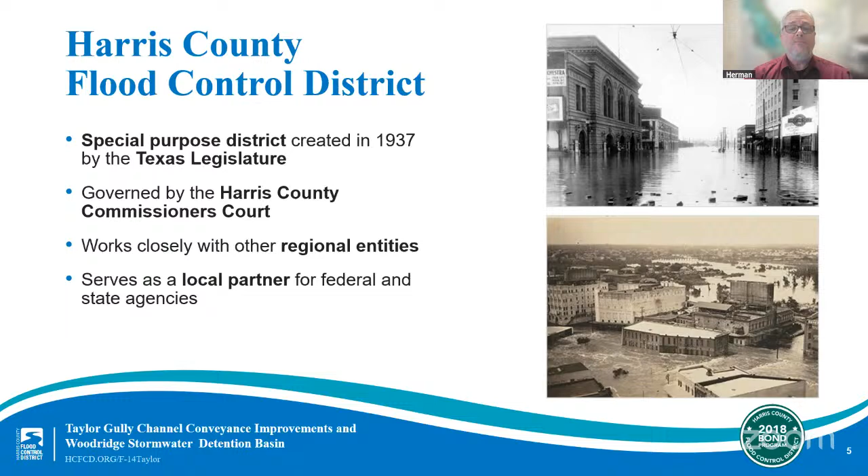The Flood Control District is incredibly unique in its mission. In addition to the unincorporated areas of Harris County, we also have 32 municipalities within our boundaries. Our agency can partner with these other cities, precincts, and local agencies to work together on flood risk reduction projects at both the local and regional level.

So not only do we plan and implement new projects that expand and improve our drainage network, but we also have maintenance teams working day in and day out to help keep our bayous and channels ready when the next storm hits. In fact, it's built into our mission to plan, implement, and maintain flood risk reduction projects guided by community and natural values. That last part, guided by community and natural values, is so central to who we are.

And it's also one of the most difficult challenges we face, building projects that not only reduce the risk of flooding, but also respect the needs of the community and the environment, especially in a highly urbanized area such as Harris County. That's why your input at meetings like this matter so much.

I'm sure it's safe to say that everyone joining us tonight probably knows that Harris County is prone to flooding. But why? Not only do we have extreme rainfall events like tropical storms and hurricanes, but our land is flat, which means stormwater often moves slowly, making its way to bayous and channels.

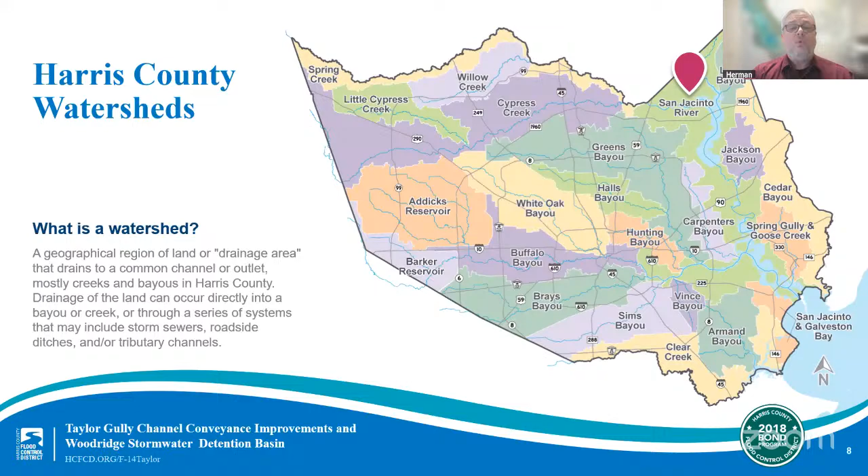Those drainage systems are typically managed by either the Harris County Engineering Department, a municipal utility district, or a city, like the city of Houston. The stormwater then makes its way to the larger bayous and channels before it finally heads out to Galveston Bay.

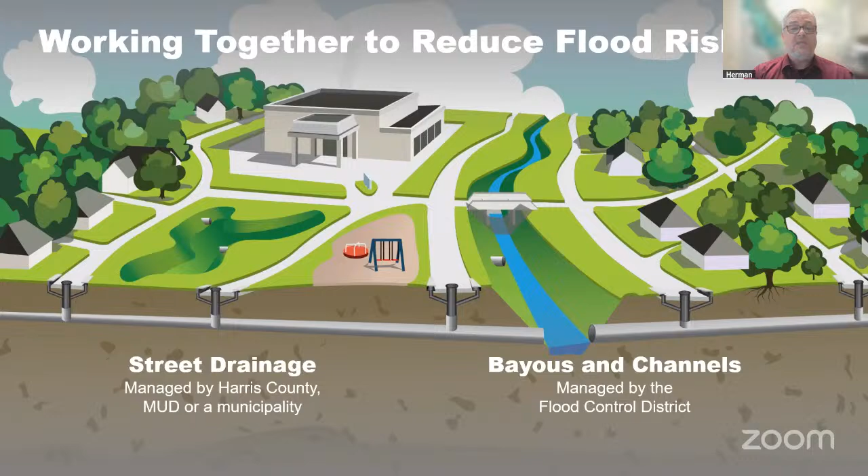We take our role in flood risk reduction for Harris County very seriously, and we leverage different types of funding opportunities for projects that can help reduce the risk of flooding in our region. One very important source of funding comes from the 2018 bond program.

Back in August 2018, Harris County voters approved $2.5 billion in bond funds for flood risk reduction projects across the county. This decision didn't happen overnight. Before the election, we held 23 community meetings, one in each watershed, because we wanted to hear directly from the residents about their priorities and concerns.

Those conversations helped shape what is now a list of 181 bond IDs, of which more than 20% were added directly from community input. Each bond ID can include multiple projects. The actual timing of each bond project depends on several things like funding, environmental permitting, right-of-way acquisition, utility relocation, and specific grant requirements.

It's important to note that even though voters approved $2.5 billion for the 2018 bond program, the estimated total cost of every project on our bond project list is actually much higher than that. From the very beginning, we've been clear: in order to see all bond projects through construction, we would need funding partners.

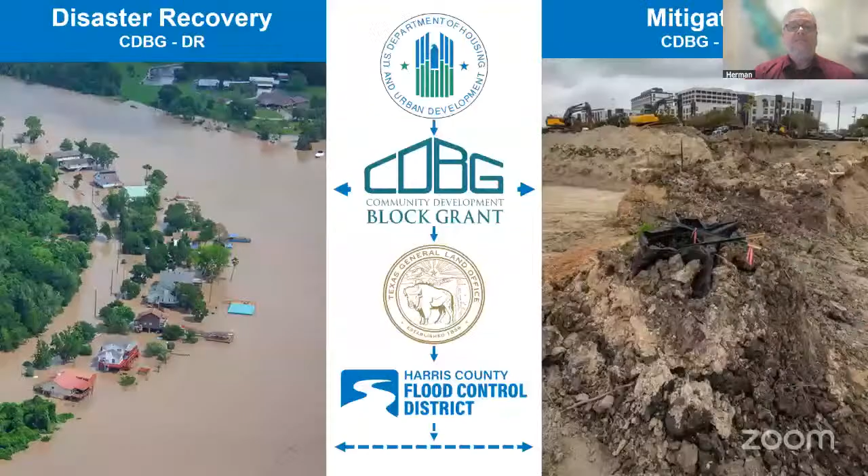Now I'll share a little more information on the funding partners and cost of this project. First, the estimated total project budget for the Taylor Gully Channel Conveyance Improvement in Compartment 1 of the Woodridge Stormwater Detention Basin project, under the project charter, is about $56.9 million.

I want to highlight one funding partner for this project, and it's the U.S. Department of Housing and Urban Development, also known as HUD. The Community Development Block Grant Mitigation Program is one of the funding programs under HUD. Mitigation funding focuses on mitigating the risk of future flooding in a community.

The Texas General Land Office, or GLO, administers the grant program at the state level for HUD. This means the GLO distributes funds to local, county, and state agencies that apply for and are approved to receive CDBG mitigation funding for projects designed to reduce the risk of flooding in the future.

The Flood Control District has been awarded approximately $541 million for projects meeting the requirements. The Taylor Gully Channel Conveyance Improvements and Woodridge Stormwater Detention Basin project is receiving $41.94 million in CDBG mitigation funding. All Flood Control District projects receiving CDBG mitigation funds must be completed by March 31st, 2028.

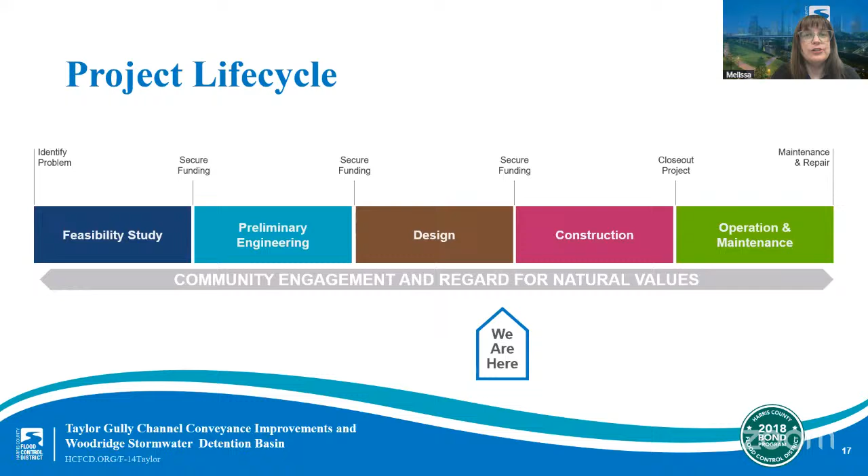We're aiming to have this life cycle stage completed by October of 2025. There are additional steps required prior to starting construction, but we anticipate breaking ground on this project by the second quarter of 2026. We'll talk more about the next steps in a few minutes. But first, let's take a closer look at the project area and the recommended design.

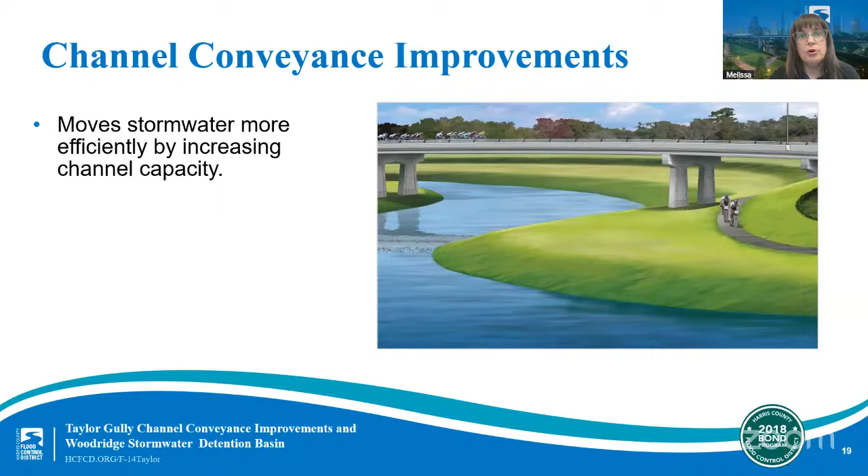So before we get into the specific details of this project, we want to define what we call channel conveyance improvements and explain how they help with flood protection. Simply put, channel conveyance improvements are man-made changes to a waterway that help it move more water, especially during heavy rains. These modifications help reduce flood damage by giving the channel more space to carry water through. This can be done in a couple of ways: by widening and/or deepening the channel, or by clearing out vegetation to reduce friction.

Now let's talk about stormwater detention basins and how they help with flood mitigation. While channel conveyance improvements help move stormwater more efficiently out of an area, stormwater detention basins hold the stormwater in one place, but only temporarily. We strategically place them in areas where they can catch extra stormwater and keep it from overwhelming channels and flooding downstream communities. Once water levels in the channel go down, the stormwater stored in the detention basins flows through pipes back into the channel and eventually out into Galveston Bay.

As mentioned before, the Flood Control District is a no adverse impact agency, meaning we do not allow our projects to reduce flooding risks for one area while increasing the risks somewhere else. That's why stormwater detention basins are often built before or at the same time as channel conveyance improvements, to prevent any unintended impacts downstream. So first we give an area the ability to store excess stormwater, and then we find ways to move it out of the area even faster.

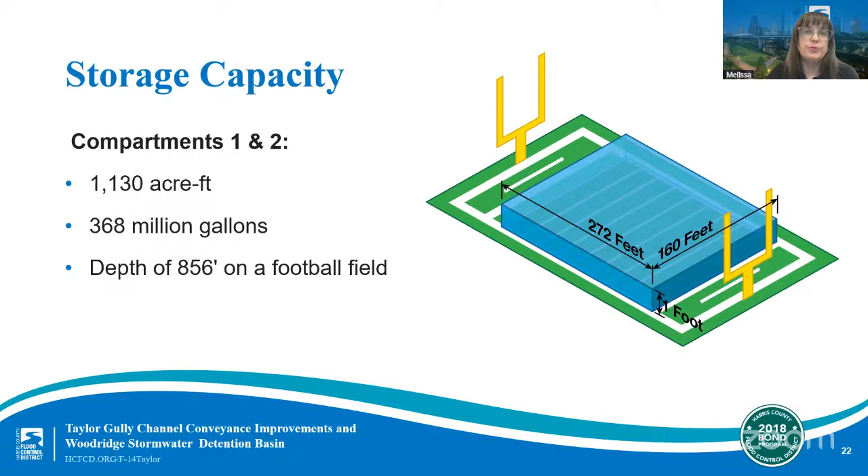So with this information in mind, let's dig deeper into the recommended project design.

This project includes approximately 2 miles of channel conveyance improvements along Taylor Gully. These improvements include installing a concrete low-flow rectangular channel in the center of Taylor Gully, approximately 350 feet downstream of Creek Manor Drive to the existing drop structure 1,500 feet downstream of Mills Branch Drive.

The existing grass-lined slopes will remain intact as much as possible. The flow line of the concrete low-flow channel section will require the existing culverts at Rustling Elms Drive to be lowered by approximately a few feet, and therefore the proposed design also recommends replacing these culverts with a 3-span bridge.

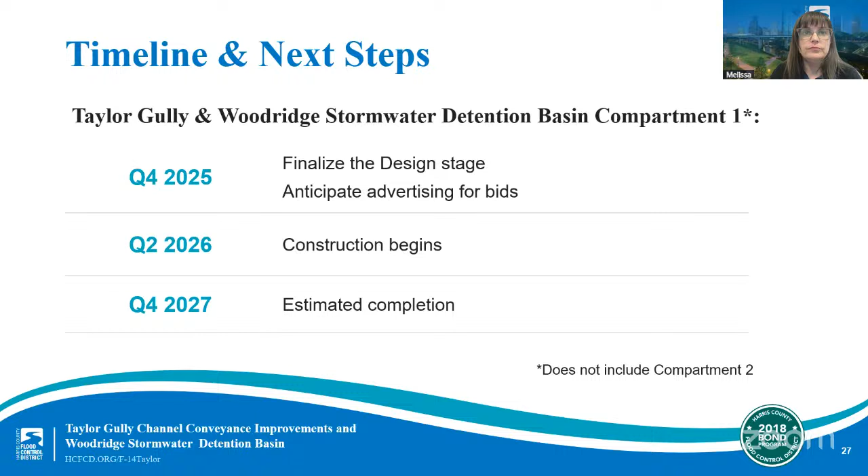Again, we appreciate you attending this meeting to listen and learn more about our work. And it's now time to hear any questions or comments that you'd like to ask or share. So I will hand it back over to Robert to kick off the Q&A portion of tonight.

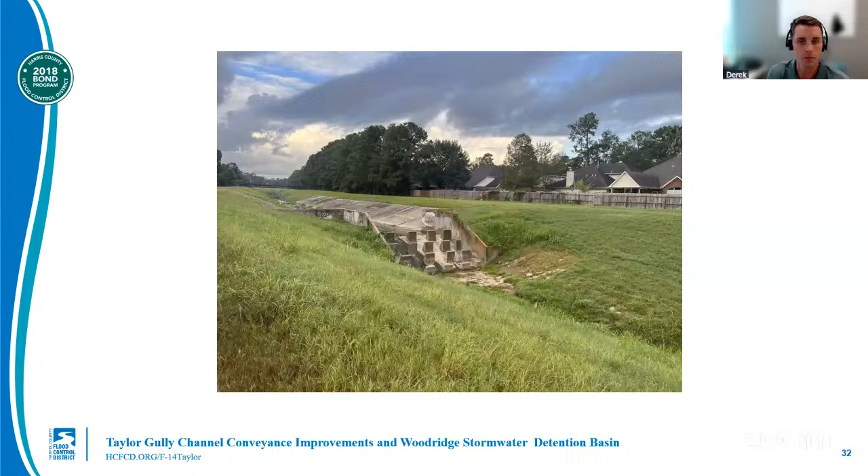Yeah, definitely, thanks Robert. So like Melissa mentioned in the presentation, the concrete-lined section with the low flow has vertical walls, so it is common throughout Harris County. The Taylor Gully channel has a certain amount of existing right-of-way available, and it goes through an established neighborhood, so there's not really any right-of-way that can be acquired through this area. So this is a perfect solution when we're trying to get channel improvements where you can't widen a channel because you have limited right-of-way.

All right, thank you, Derek. And we do have another question for you. Derek, we touched on this some in the presentation, but can you please explain why construction of compartment 1 will be occurring in coordination with the channel conveyance improvements?

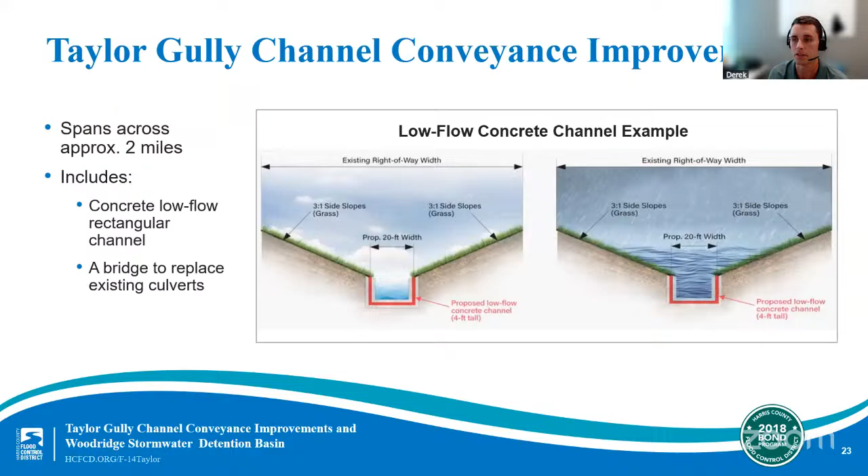Melissa had another slide on this about the stormwater detention basins and what those are mainly designed for. For this project, the storage volume is needed in order to mitigate the impacts from the channel improvements. This is why we're constructing compartment 1 — we want to make sure the project doesn't increase water flows or raise any surface elevations downstream of the project area. So stormwater detention basins are usually built before or at the same time as channel projects.

All right, thanks Derek. Emily, our next question is from Mr. Miniter, another HOA board president in the area. He mentioned that the flood control district recently desilted Taylor Gully from Mills Branch Drive to Mill Branch Way, and he is concerned about the section of Mill Branch Way and West Lake Houston in Mills Branch Village. He says that some of the corrugated metal storm drain outflow conduits have been damaged. Also, he mentions that some of the banks have collapsed into Taylor Gully. He's requesting maintenance on this. Emily, can you please talk about the best way to address this concern?

Sure, absolutely. Thanks Robert, and thanks David for flagging that for us. We don't have our maintenance team on tonight, but as soon as I saw you sent that in, I flagged it for our head of maintenance internally, and I'll follow up on that. In the meantime, I'll also drop you a note in the chat with our Citizen Service Center where you can share photos if you have them or any background that might be helpful. I'll make sure to work with our team and have some crews go out and take a look at that.

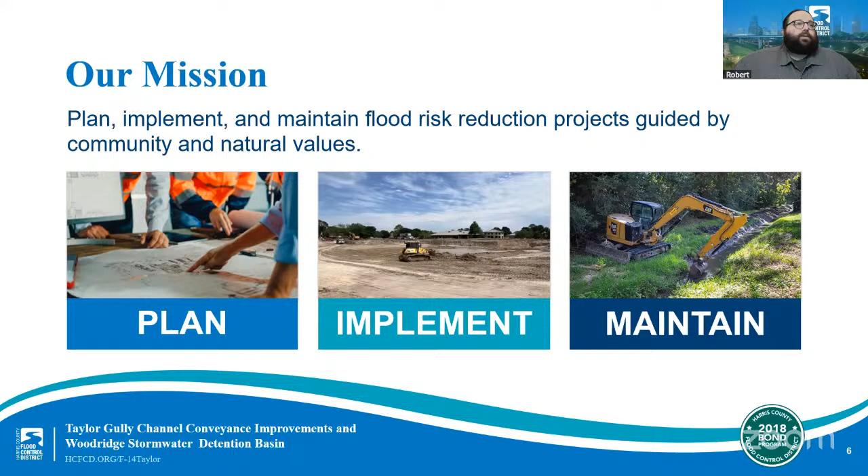Our next question is for Stephanie. Another question, sorry about that. It was mentioned in the presentation that the City of Houston owns part of the property where the Woodridge Stormwater Detention Basin will be constructed, and that they have plans to build a regional wastewater treatment facility on the property. Do you have an update on the estimated timing of this being built?

So the Woodridge site sits on about 267 acres, and the City of Houston owns 73 of those acres, while flood control uses nearly 195 for the basin. So the city does have plans to use a portion of that property to improve their wastewater services. However, the exact timing of that, I'm not sure. We have coordinated with them, and it seems to be not anywhere in the near future, but for the latest updates, you can go to the City of Houston websites or reach out to them directly.

All right, thanks Stephanie. Our next question is for Melissa. Melissa, will any of the funds coming from the City of Houston be used for recreational amenities around the Woodridge Stormwater Detention Basin, or is it only for the Taylor Gully channel conveyance improvements?

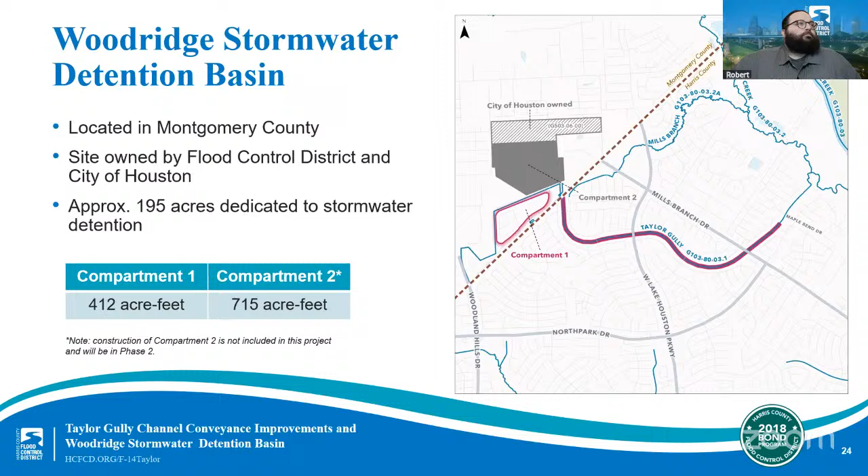Yeah, so the City of Houston's contribution is only for the channel conveyance improvements along Taylor Gully. And on that note, I would like to say that we sincerely appreciate our funding partners, especially when we have overlapping jurisdictions like for this project. So in addition to CDBG, the City of Houston and the Texas Water Development Board's Flood Infrastructure Fund offer important partnership opportunities to help complete these types of larger projects. So thank you to our funding partners.

All right, thanks, Melissa. Our next question is for Derek. Mr. Rehack says it's 5 existing basins that he was talking about tying into. Can you talk about that?

Yeah, sure. So for the northern basin, we have 3 box culverts connecting to several basins around compartment 2, connecting the proposed compartment 2 basin with the existing one. Then for compartment 1, there'll be large box culverts connecting that. So they'll all be connected to store water from the channel improvements.

All right, thanks, Derek. Our next question is for Chris. Chris, can you talk about the area of inundation expected changes as a result of this project? Mr. Bowman is curious about flood insurance and just wants to get an idea.

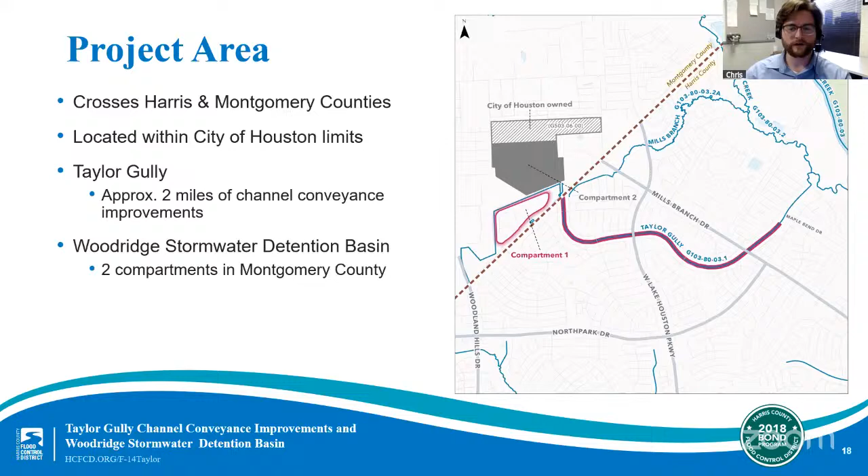Sure thing. So I'll first state that flood insurance and flood insurance rates are determined by the maps generated by FEMA. So our project will work to reduce those inundation boundaries, but we're not the ones responsible for the rates.

So to address the question of where the inundation boundary is being reduced, the extents are largely reduced in the upstream end of Taylor Gully in the Elm Grove Village and Mills Branch Village neighborhoods. That's where a large majority of the inundation acreage is being reduced.

All right, thanks, Chris. Derek, this next question is for you. Miss Burnett is asking about comparing the May and September 2019 storms. If those events happen again, will this project help, and in what way?

Yeah, thanks for the question, Robert. I'll hand this one over to Chris to help give some feedback on the question here. Sure. Okay, so those two storm events mentioned — I believe the September one was most likely Tropical Storm Imelda.

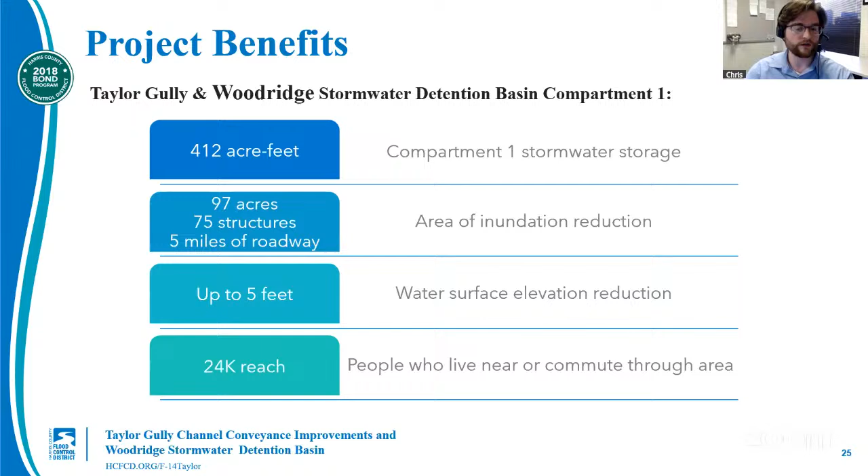The modeling that we went through on this project did not specifically include those storm events explicitly. In our development of our normal frequency events, the likelihood of events like this happening is indirectly included in that. So hopefully when we are modeling these frequency events, the metrics you can see on the screen are an indication of the improved performance of the area that you should expect.

All right, thank you, Chris. Our next question is for Melissa. Melissa, we are often asked how a wet bottom detention basin full of water can hold more water. Can you please explain this?

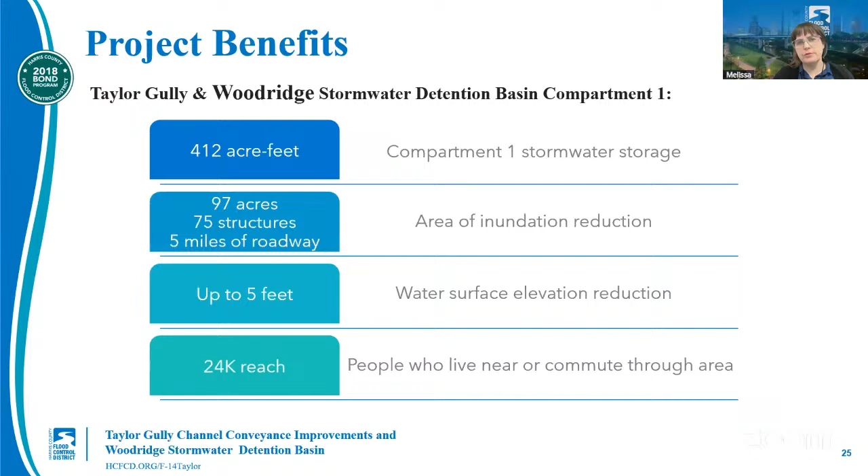Sure. So the most important thing to note is that a wet bottom stormwater detention basin is not full when you're looking at it prior to a rain event. During a rain event, the additional storage it provides is accumulated above the permanent pool that's there normally all the time.

A dry bottom stormwater detention basin, on the other hand, we have to design that to dry between rain events. So basically we have to work with gravity, and just because of the slopes and the geometry of a dry bottom basin, you tend to lose storage compared to a wet bottom basin.